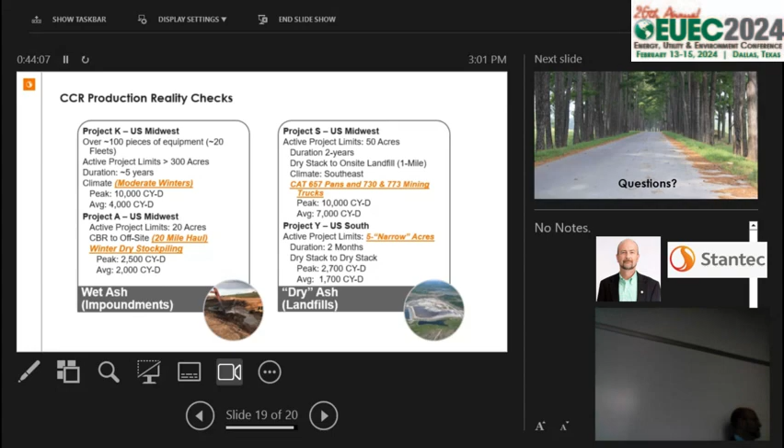Utility life and went into consulting. So I hope you all had enough about excavation, because we're not going to talk about excavation at all. No excavation in this closure technology.

So we're going to talk about discrete in-situ solidification as a closure option, and I just wanted to see who's in the audience is familiar with the in-situ solidification, also called ISS. Good, so I can go quickly through the introductory portion.

So there's two elements to this. There's a closure technology overview, which is a holistic approach to closure relying on containment, both groundwater containment from a horizontal and a vertical standpoint, and then also a case study where we're implementing this technology at a plant in the Midwest for an undisclosed utility.

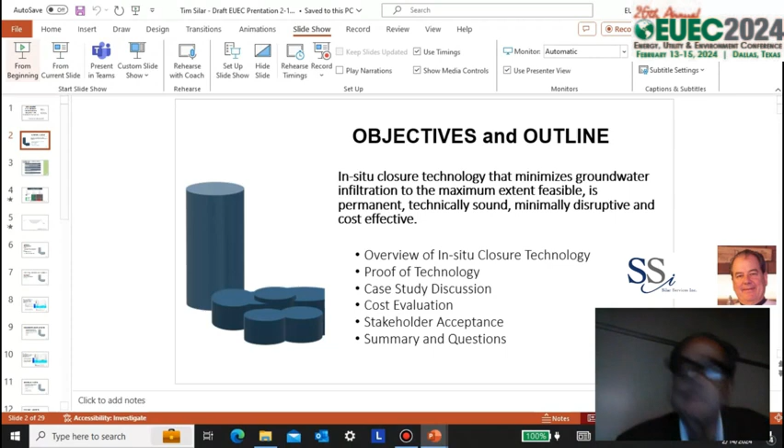Pardon me? F5. F5. Wait, let me put my glasses on to see F5. I'm not that familiar — you gotta go to presentation mode. Presentation slide. I got it. I got it. Do I have to start over? Thank you.

Okay, so the objectives of the talk are to present this closure technology, which minimizes groundwater infiltration to the maximum extent feasible, as required in the EPA regulations. It's permanently technically sound, minimally disruptive, and cost effective.

This is the agenda outline: an overview of the closure technology, the proof of technology, the project we're working on as a case study, the cost evaluation, a slide on stakeholder acceptance, and then you all can ask me a bunch of questions.

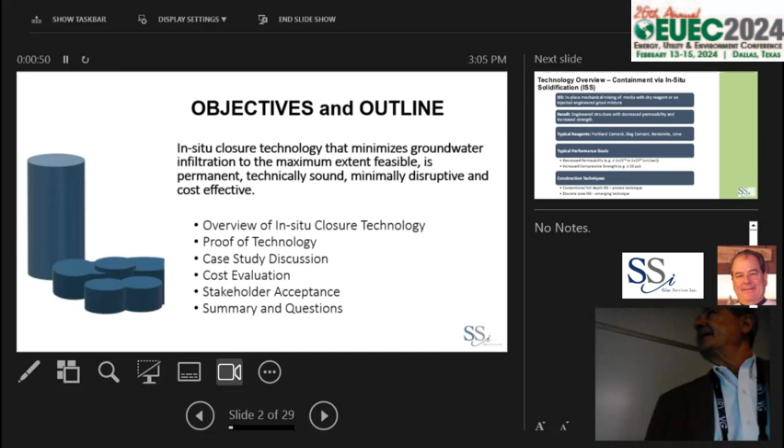ISS, in-situ solidification, for those who don't know what it is, is the in-place mechanical mixing of media — could be soil, could be ash — with dry reagent or an engineered grout. The goal is to decrease permeability and increase strength. Reagents are typically Portland cement, slag cement, bentonite, lime — those are some of the reagents we've evaluated.

Performance criteria is generally to decrease permeability to less than 1 times 10 to the minus 6 to 1 times 10 to the minus 8 centimeters per second — that's dependent on the regulatory agency — and to increase compressive strength to greater than 50 psi. For our technology, we use conventional, fully penetrating ISS columns, and also discrete zone columns, which is an emerging technology.

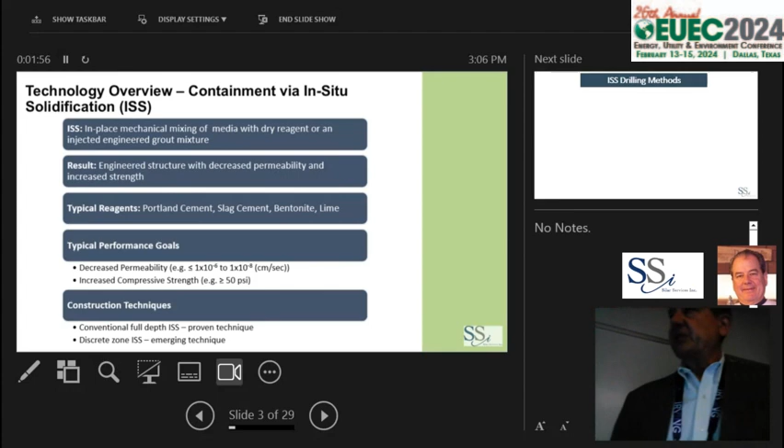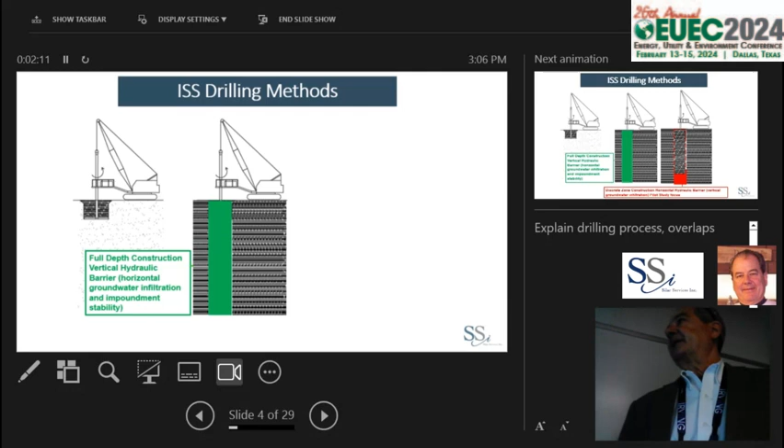So there's our typical crane-mounted drill rig. This is a fully penetrating column, which goes from the surface all the way down to your target zone, similar to the presentation earlier this morning. This is a way to establish containment for horizontal groundwater flow, similar to slurry walls.

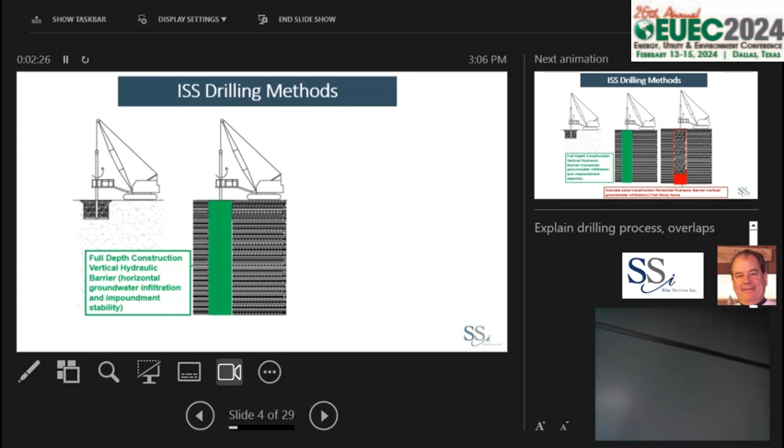And then we have discrete zone ISS, and with overlapping columns in the discrete zone, you basically create a liner which mitigates vertical and horizontal flow.

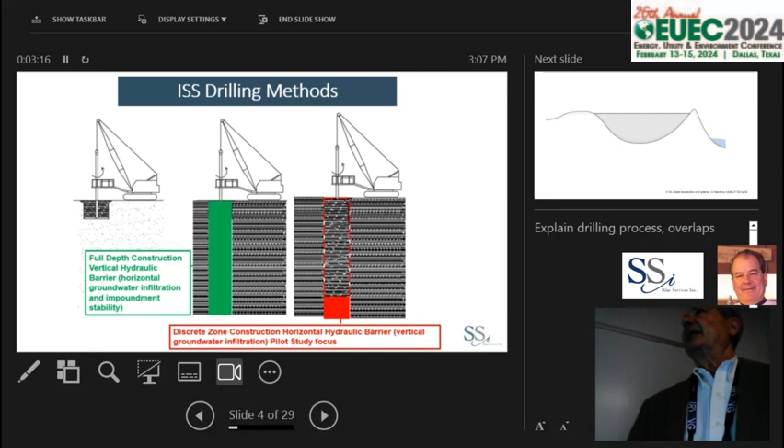So I think this next slide goes into an animated presentation that's about 3 minutes long, and it will give you an idea of how this works. It's much more effective than me trying to stand up here for 3 minutes and talk to you about it. We can dim the lights, and I can answer any questions after the video, but hopefully it will give you the feel for the technology.

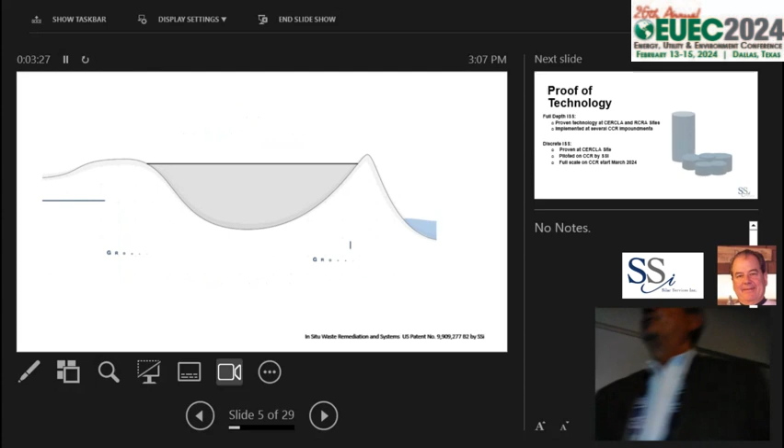Here we show a typical ash impoundment constructed within earthen berms along a water body. The ash is in contact with groundwater, which flows horizontally through the ash, discharging to the water body, and fluctuates vertically in and out of the ash.

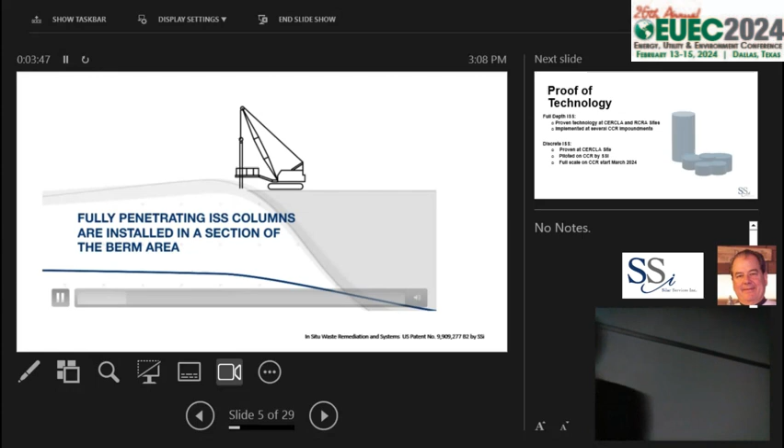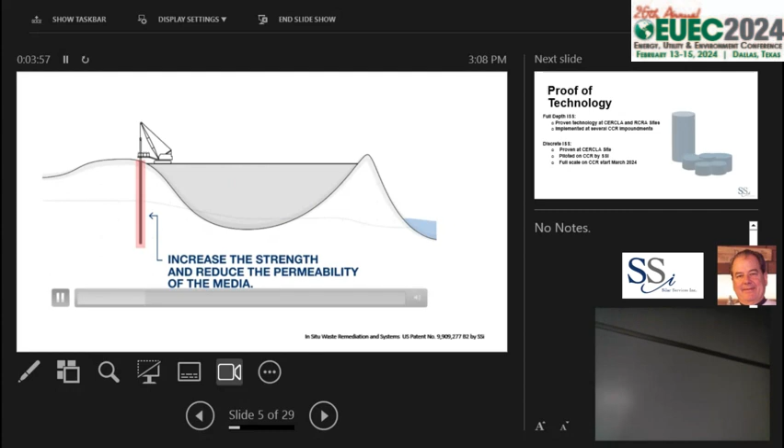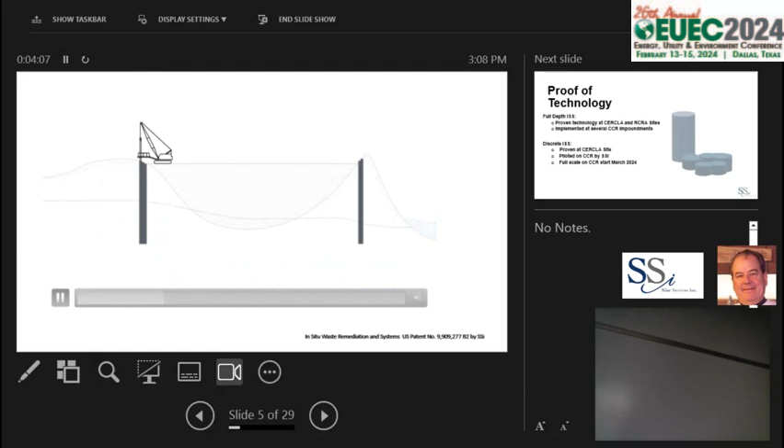Our technology uses two types of in-situ solidification, or ISS, methods to achieve closure. Initially, fully penetrating ISS columns are installed in a section of the berm area. Media is mechanically mixed with an injected reagent, generally a cement mix, to increase the strength and reduce the permeability of the media. Full-length columns are generally mixed 3 times from the surface to the total depth to achieve good homogeneous mixing. After completion, the full-length columns around the perimeter of the impoundment provide structural stability and deflect the horizontal groundwater flow in and out of the impoundment. This ISS method is similar to slurry wall construction.

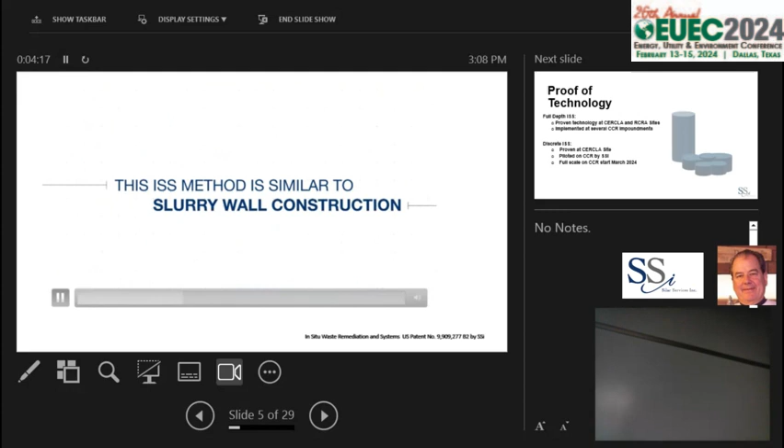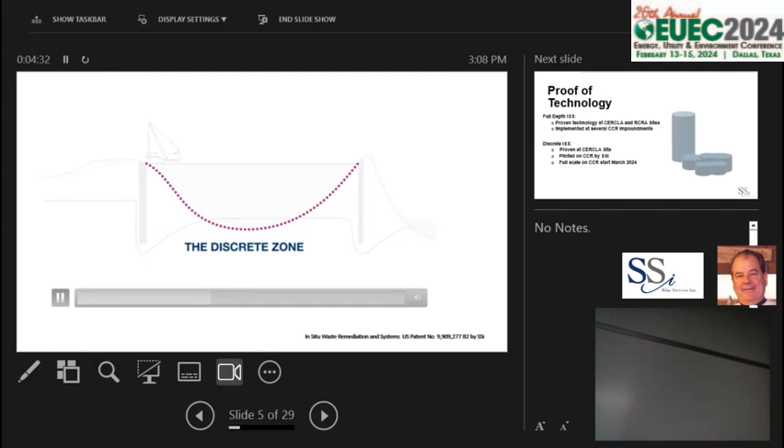The second ISS method used in our technology is the construction of discrete ISS columns at the bottom of the impoundment at the interface between the ash and the naturally occurring material, which we refer to as the discrete zone. The discrete ISS columns are installed either concurrent with or soon after the full-length column installation.

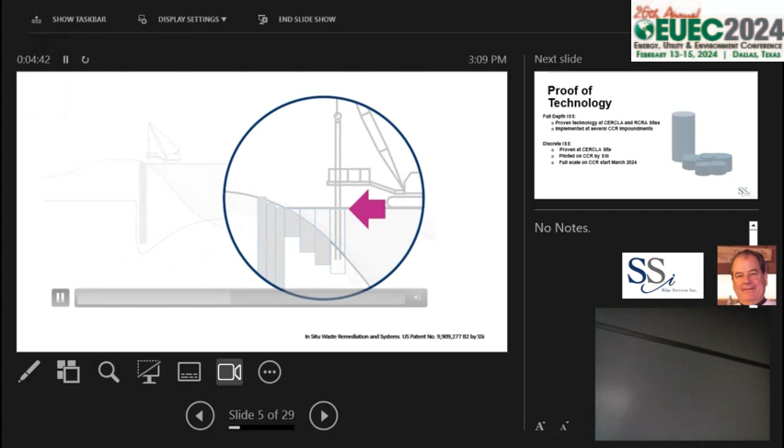Ash is mechanically mixed from the surface to the top of the discrete zone, where a reagent is then injected and mixed in the discrete zone a minimum of 3 times.

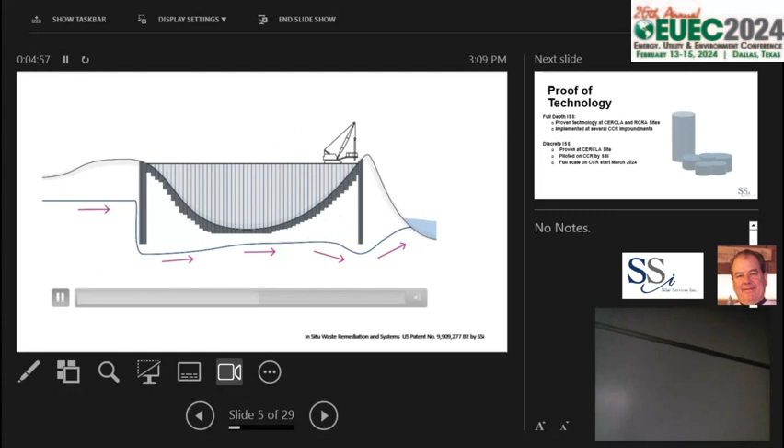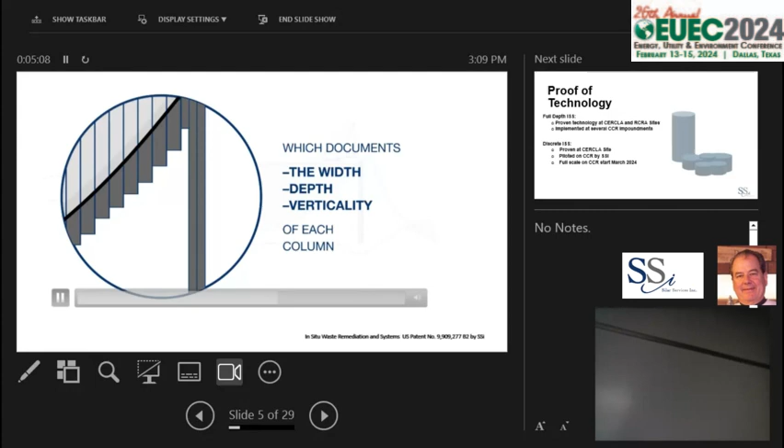The construction of these discrete zone columns continues throughout the bottom of the impoundment, with each column overlapping the adjacent columns. This overlap is confirmed with a real-time quality control system which documents the width, depth, and verticality of each column. The continuous discrete zone can be engineered and constructed to meet various criteria and performance standards.

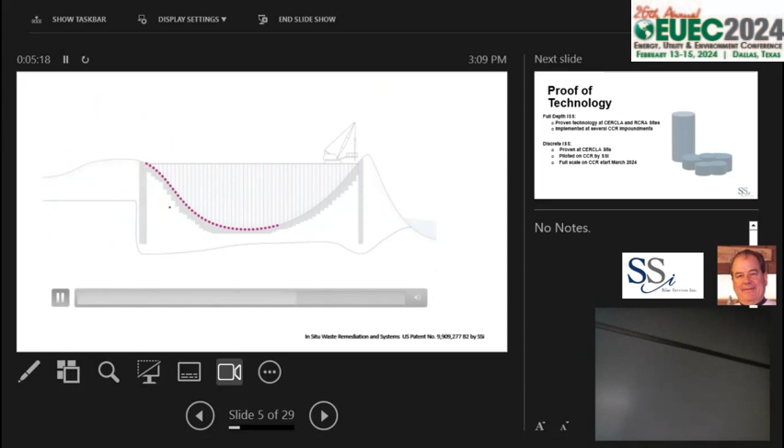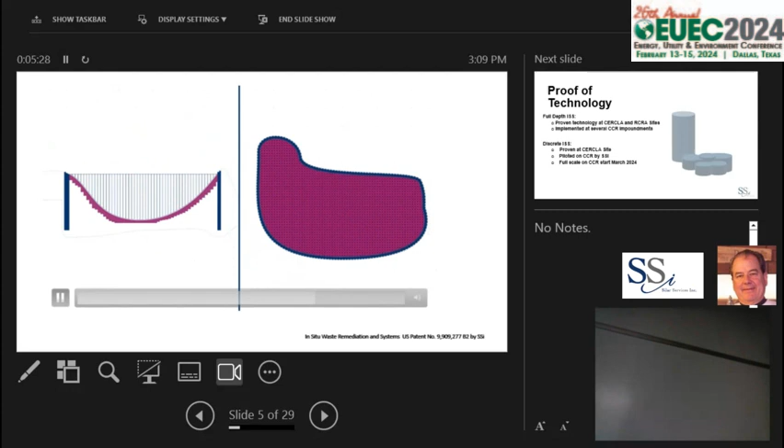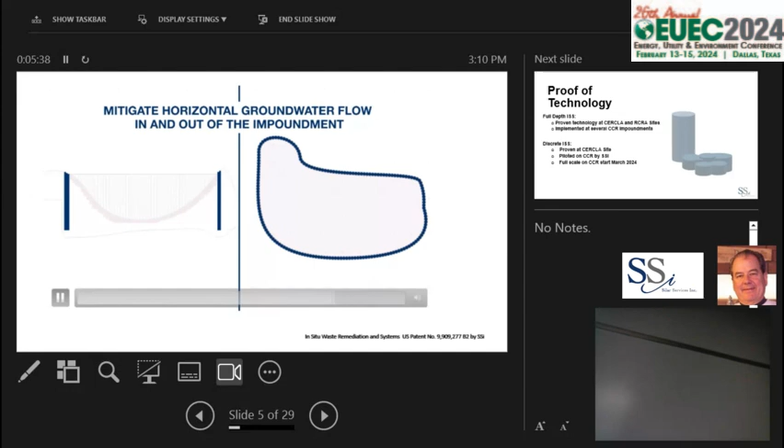The continuous discrete zone creates an impermeable barrier below the saturated ash that eliminates groundwater infiltration vertically in and out of the impoundment. A plan view of the completed impoundment shows fully penetrating columns along the perimeter that provide structural support and mitigate horizontal groundwater flow in and out of the impoundment, and the discrete columns in the interior that mitigate vertical groundwater flow in and out of the impoundment.

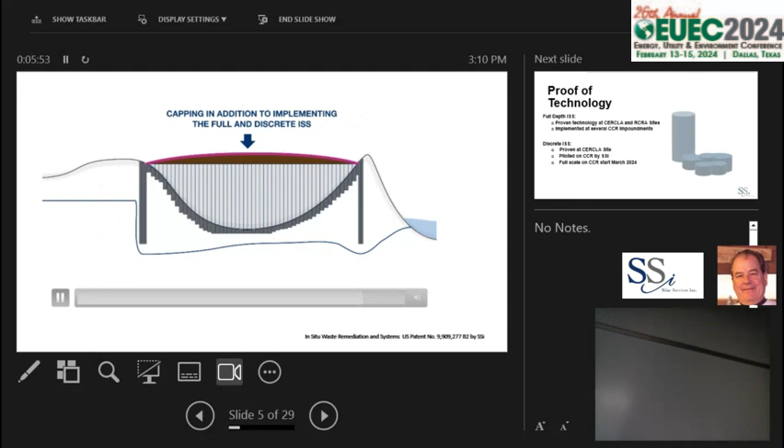Concurrent with ISS construction, or soon after, the impoundment is capped in accordance with state and/or federal requirements. Capping, in addition to implementing the full and discrete ISS, provides complete encapsulation.

So anyway, are there any questions on that? I apologize that the video did not.

So with doing that, once it's complete, does the original impoundment no longer become a regulated dam? I don't think so. Because most of those are regulated dams, so you would have to maintain dam safety permits for the life of the basin.

So anyway, the next slide is the proof of technology. This technology, full ISS, has been around for a couple decades. It's been used on CERCLA and RCRA sites. It's been implemented at CCR impoundments, and then the discrete ISS was demonstrated at a CERCLA site.

We piloted at this site last year, and we're starting full scale next month.

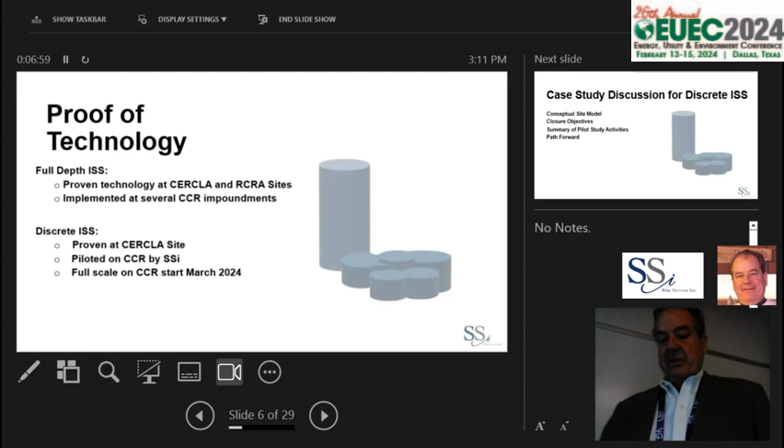So I'll talk about the case study a little bit, this is the site that we're working on. I'm going to talk about the conceptual site model, the objectives, the summary of the pilot study activities we did last year, and where we are currently.

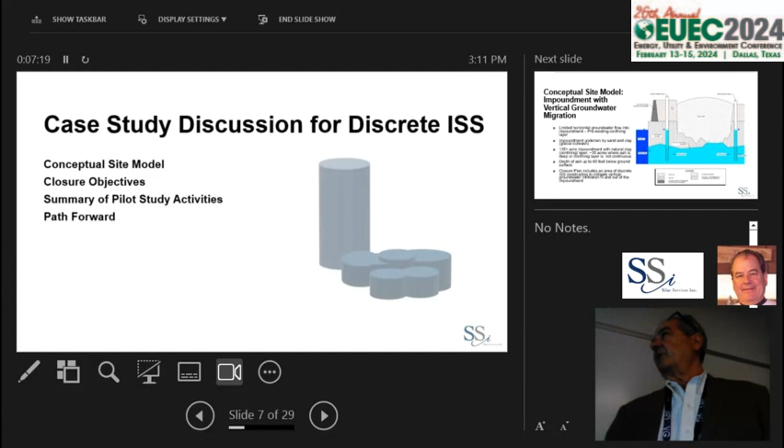So this is the general site layout. We have limited horizontal groundwater flow because we have a confining layer in this area from pre-existing conditions. It's all glacial outwash. There are areas in this impoundment where the confining layer is absent or the ash is deep.

And this is problematic when the river rises, the potentiometric pressure causes vertical migration of groundwater in and out of the impoundment, which the regulator said needed to be addressed. So the options to the client were basically, you can dig up this entire 135 acre ash impoundment, or you can fix this.

The scale on this is sort of exaggerated just a little bit, but ash in this area is up to about 60 feet deep.

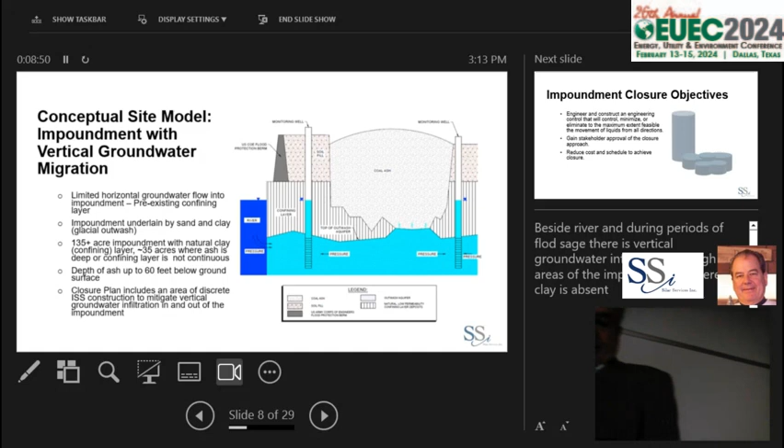So basically, this is a little different than the animation. The animation was to address both horizontal and vertical groundwater flow. The project that we're working on is just really to address vertical groundwater flow, which has been a problem at many sites and something that EPA is anxious to have people address.

Our impoundment objectives were to construct an engineering control to minimize to the maximum extent feasible movement of liquids from all directions. So we had our natural clay layer that inhibited horizontal migration, and we had our plan to install this discrete zone to eliminate or mitigate vertical migration.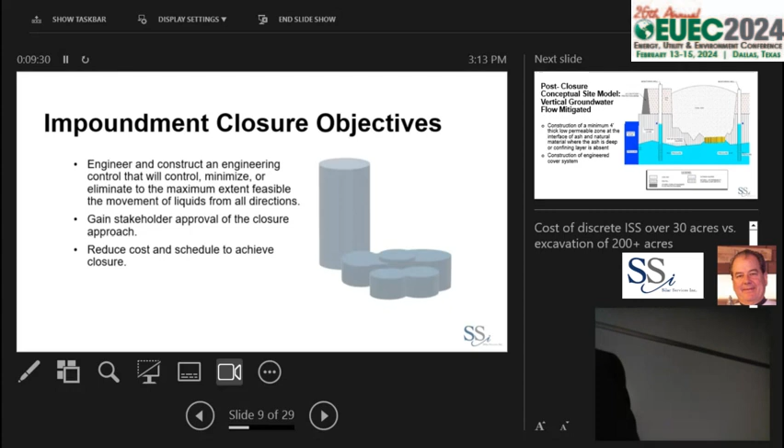The objective was to gain stakeholder approval, which we did through a series of public meetings and notifications, and to reduce the cost and schedule to achieve closure.

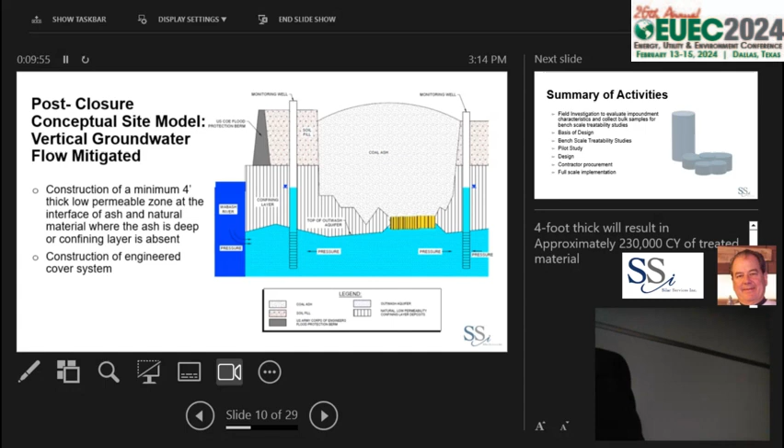So basically, what's the fix? We're installing a 4-foot thick, low permeable zone in this area to address the vertical inflow. And then there'll be an engineered cover to cover the surface and create a pretty much containment zone.

So things that we've done so far at the site: we did a couple of rounds of field investigations to evaluate the feasibility of the technology, did a basis of design report, we did bench scale treatability studies to determine different mixes for the different types of ash and different types of underlying material that we were going to select for our discrete zone. We did a pilot study.

Actually, the guys from Forgen were the contractors that did the pilot study last year out there for us. We finalized the design, assisted the client with contractor procurement, and procured a contractor, which unfortunately wasn't Forgen, but that's okay. And we're getting ready for full-scale implementation.

We had 8 contractors bid on this project, and this, just for total transparency, is the first time full-scale this has ever been done, this technology. But we knew it could be done. We knew we had contractors that were smart enough and knew how to do it, had the experience that they could do it.

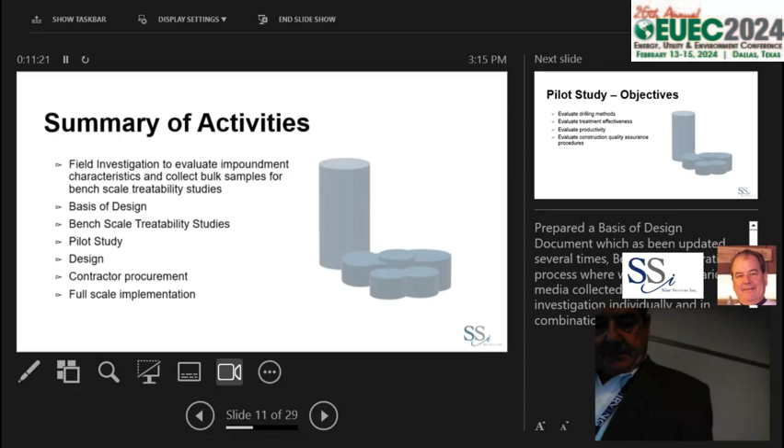Pilot study objectives: we wanted to evaluate drilling methods. This was basically drilling methods to get from the top of the ash impoundment down to the discrete zone. We wanted to evaluate our treatment effectiveness with our different mix design. We wanted to evaluate productivity because, as Don was talking about, it's all about productivity. How fast can these guys go?

Because this had never been done full scale, we didn't know how they could do it. So we evaluated that, and we evaluated our quality assurance procedures, which was a major thing because, as was talked about in the slurry wall discussion, you can't see what you're doing. You can't see your discrete column. Well, they're not that little - they're 12 foot in diameter, 4 foot thick, but 60 feet under the ground. So how do you see this, and how do you know that the next one you put next to it is overlapping the one you just installed? So that's a little tricky.

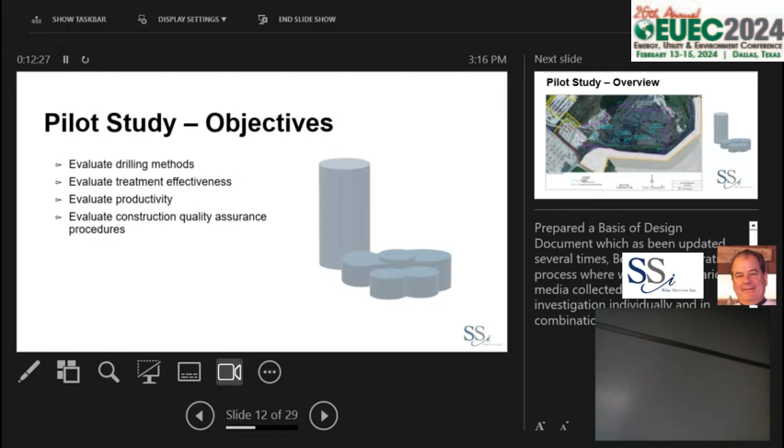We'll talk about that a little bit. So this is an area - this is our 30-acre area in the whatever color that is. And then we had 3 areas where we did our pilot study, based on different material and different depths. So we had one area.

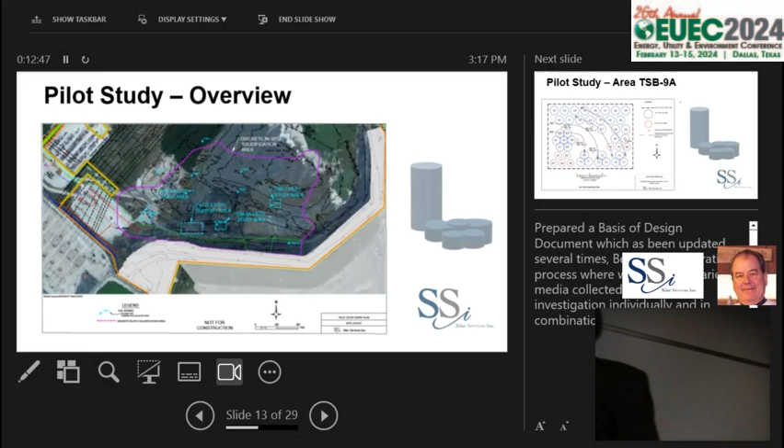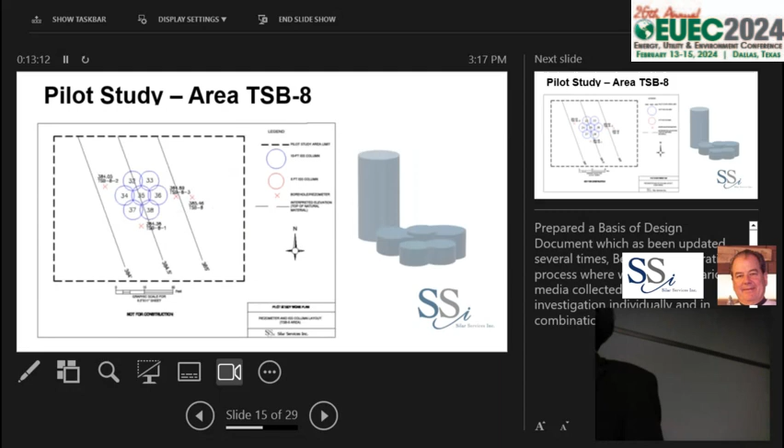So in summary, we did 61 columns. We did single columns to look at mostly reagent-less drilling fluid. We did 5 groups of 3 columns to evaluate overlap. We did 1 group of 7 and 2 groups of 8 to basically evaluate productivity. We evaluated 5 drilling fluids and 2 auger sizes.

The discrete zone was reached at all locations. We did 3 sampling techniques. We sampled the discrete zone, 4 feet thick. We needed to collect wet samples of that zone, which also takes a little bit of skill to do. Forgen did a great job.

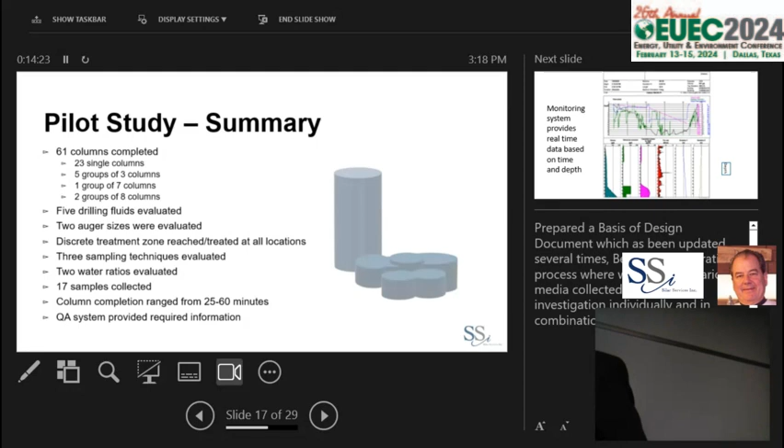We looked at 2 water ratios for our mix, collected 17 samples. Column completion ranged from 25 to 60 minutes. And we demonstrated that our quality assurance system provided required information. That's really important, and the next slide gets into that detail.

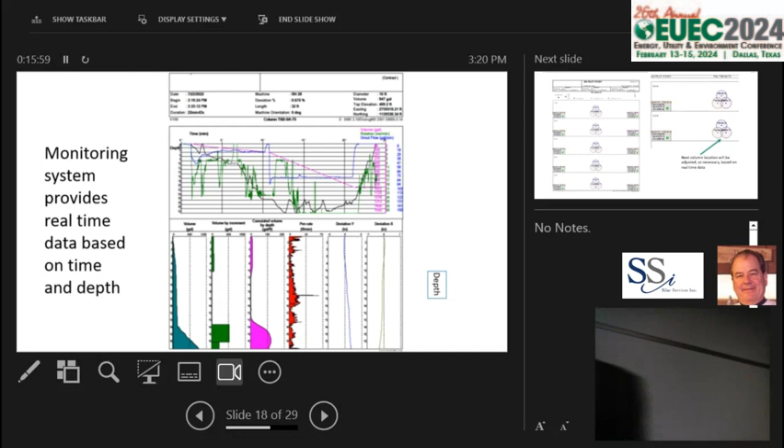This is also the output from the system, and over here we have the depths - 30 feet, 31.8. So these are the columns. This output is important because this is where your reagent is and where you're creating this low permeability liner. So you want to assure that you have overlap in your columns down at the base where you're installing your low permeable zone.

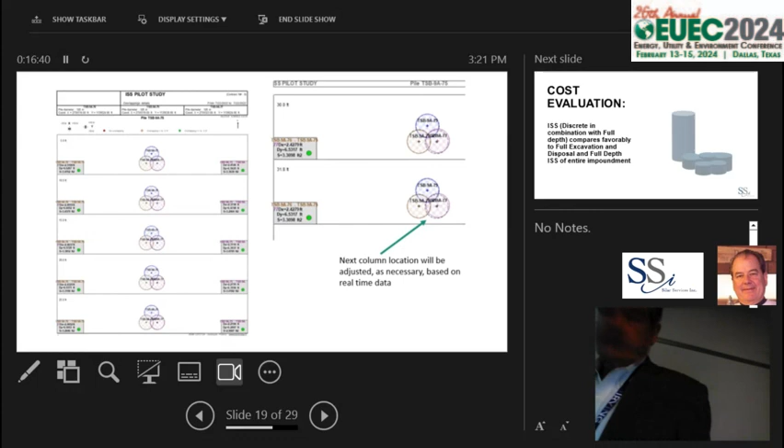Cost evaluation, I'll run through this really quickly. This goes back to the original slide that didn't have audio, but it's with the fully penetrating columns around the outside and the discrete zone at the base.

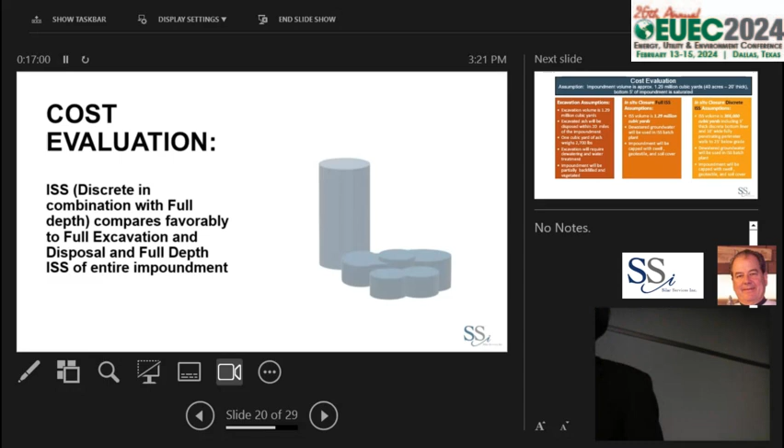These are the assumptions. So we're going to look at excavation, full ISS, and discrete ISS. We have an impoundment of approximately 1.3 million cubic yards, 40 acres, 20 feet thick, with the bottom 5 feet saturated.

So your assumptions for excavation are you're going to dig it all up, transport it some distance away, and the impoundment has to be backfilled. And you have to dewater—real pain in the butt, dewatering sounds like.

Full ISS, you're treating the entire 1.29 million cubic yards. No dewatering. The impoundment will be capped. There's no swell—I know my sound didn't work, this is not the updated one.

Our pilot study indicated you don't generate any swell. You have this hydraulic compaction with the ash—once you start injecting water, the ash compacts itself. We actually lost material in most of our columns in our pilot study. We didn't generate swell, which you would normally do on an ISS project if you were just dealing with soil.

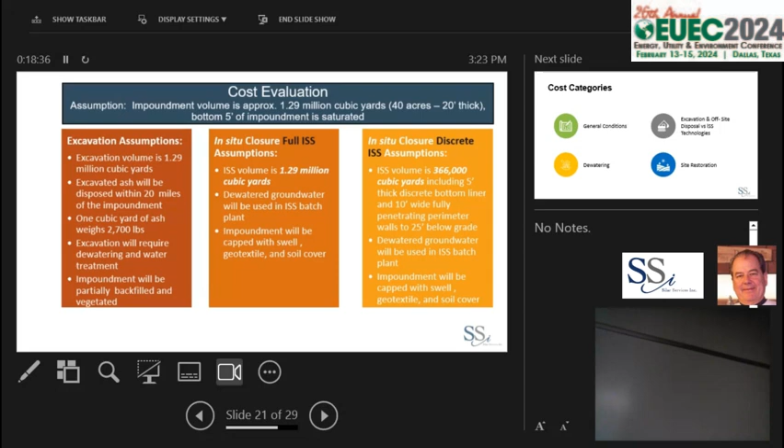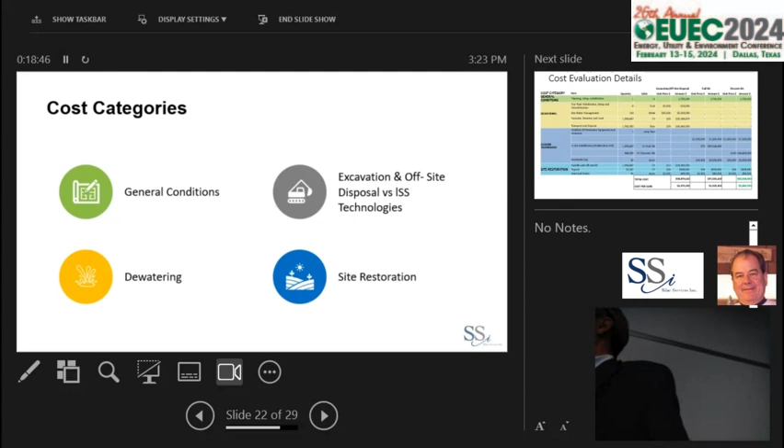For the discrete ISS, we're only doing ISS at 366,000 cubic yards because you're doing the perimeter and the 5-foot thick zone at the bottom. So typical cost categories: general conditions, dewatering, excavation, ISS, and site restoration.

The general conditions we kept basically the same, just for apples to apples. These two up here are the dewatering. This excavation and transportation should be blue because they didn't update this—they're not blue. But anyway, basically excavating and transporting all the ash.

Once you get into the ISS treatment, we assumed $1 million for ISS equipment to be mobilized. Full-scale ISS is about $70 a cubic yard, coming out to about $90 million. Discrete ISS is in the neighborhood of $100 a cubic yard because there's cost associated with getting to that zone.

But your final numbers: you can see the excavation, off-site disposal, and full ISS are similar, in the range of 98 million, and discrete ISS is less than half of that at about 43 million. So those are numbers based on our scenario for our full scale.

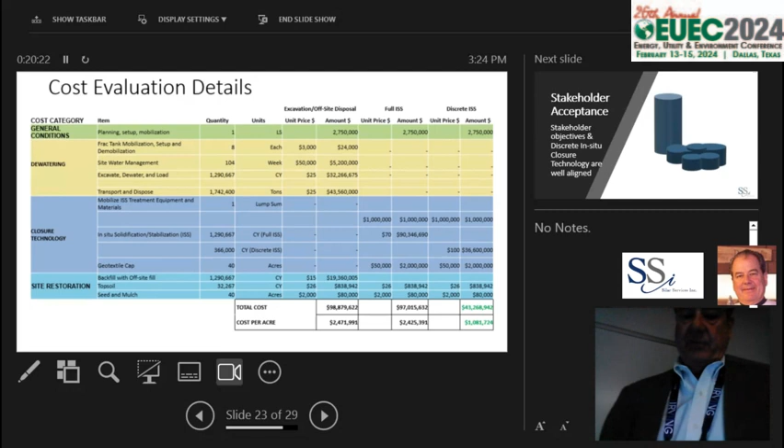The numbers for the site that we're working on—there was supposed to be another slide here—the utility provided numbers for if they had to excavate 135 acres, which the state agency said you either excavate 135 acres or you do discrete ISS on 35 acres.

The utility estimate for excavation of 135 acres was between $300 and $400 million. Our contract estimate for the discrete ISS with the remedial contractor is $50 million.

So if you look at that comparison, it's pretty significant. I think the opportunity is there to address vertical infiltration and not have to address the whole impoundment, and it was done at considerable cost savings to the utility.

So just running through real quick, these stakeholder goals are similar. Most of the stakeholder goals are similar. We have impoundment owners, regulators, public environmental groups, and public ratepayers.